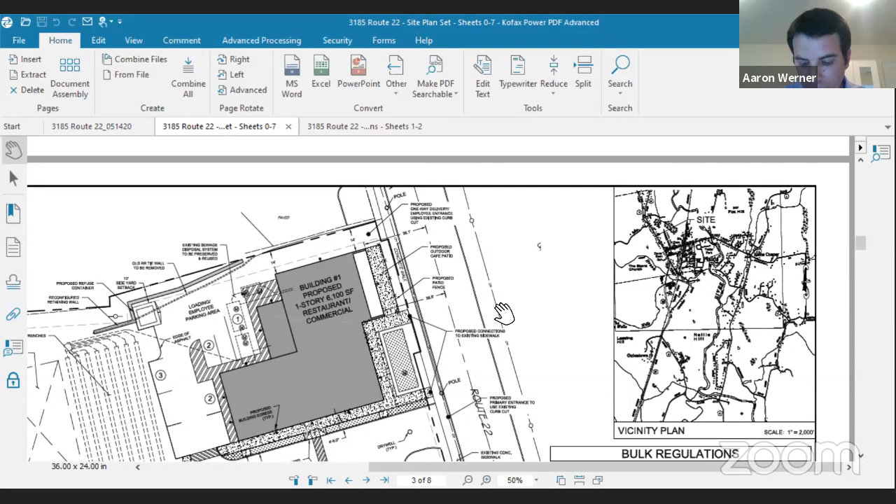Rich added a sidewalk to the plan here, as we discussed last meeting, between the residences and the commercial building on 22. It's shown here. It's connecting to the other sidewalk next to the commercial, and it provides good access from the residential down to the roadway without having to go through the parking lot.

And in doing that, Rich, correct me if I'm wrong, but the impervious went up to 55% compared to 53.8 last time. Right, so it went up a little bit. Right, and we discussed that waiver at the meeting. Right, so that waiver of the exceedance of 50% impervious is still in play. That's still something that's on the table here that they're requesting. That's comment number 10 in my memo explaining that.

That was it. I also wanted to check in, Rich, if you've heard back from the Heritage Program on that timber rattlesnake. Yes, we did get a letter back from them. I don't know if it's something, well, we'll submit that. I can pull it up separately and read it to you, if you want. I think it was their standard form letter.

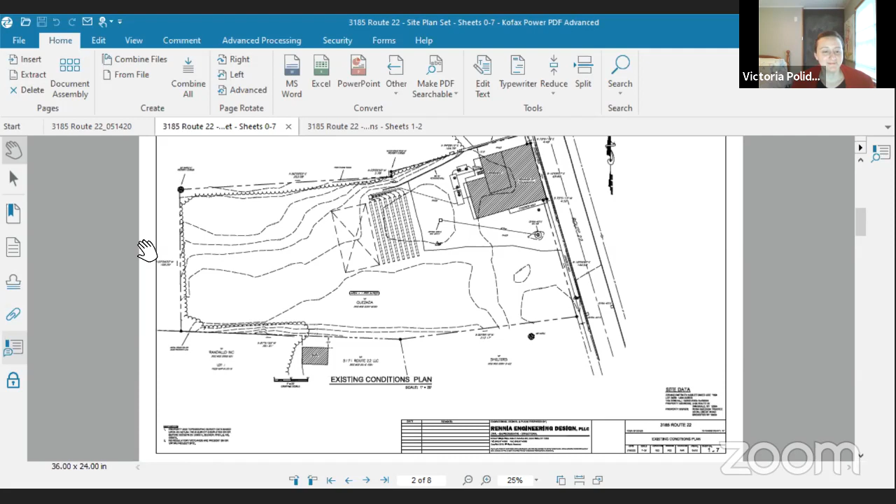Nice to hear you. So I would think that maybe we should ask for the direction, because it could be on the other side as well - on the other side of the highway. Oh, that would take you over to the East Mountain side. Right, so maybe we want to find out, because they're obviously probably not going to be crossing the road. I don't think it's that side, because that would be much more than 0.4 miles across - we'd be going all the way across the bottom of the valley, across the Ten Mile River. Yeah, that's true too.

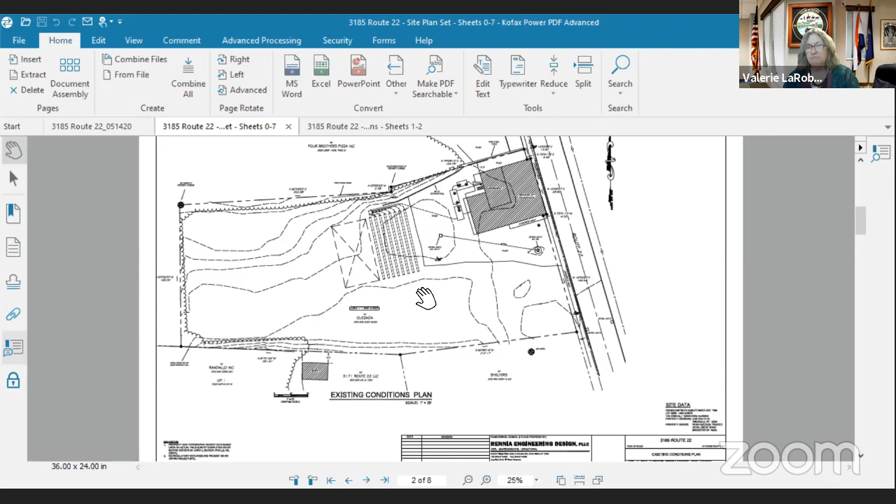Victoria, did you have any comments that you wanted to say? Just if the board is ready tonight, we've prepared a resolution to send to county planning and start the process. But as far as the plans, most of our concerns have already been addressed about the septics, sidewalks, etcetera. Okay, Joe, do you want to comment on that waiver, what your recommendation would be, or do you want to wait until you see the SWPPP? I'm okay with everything. The SWPPP is going to be submitted shortly, and that won't affect it, so I'm fine with everything the way it is. Do you recommend that we accept the waiver request? Yes, I do.

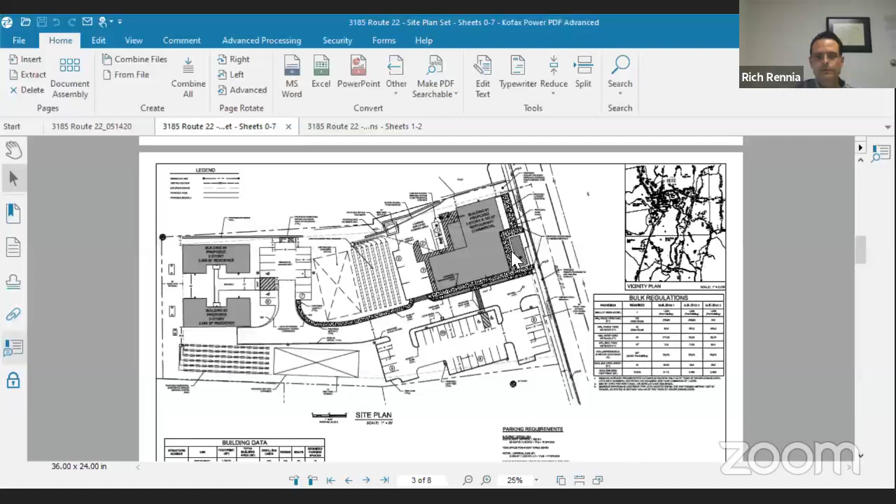That's shown on our site plan, right here—that's the bioretention. Sorry, let me zoom in. So we have the area that says proposed outdoor cafe patio. The hatched area, and then the white area right there, that's the covered portion.

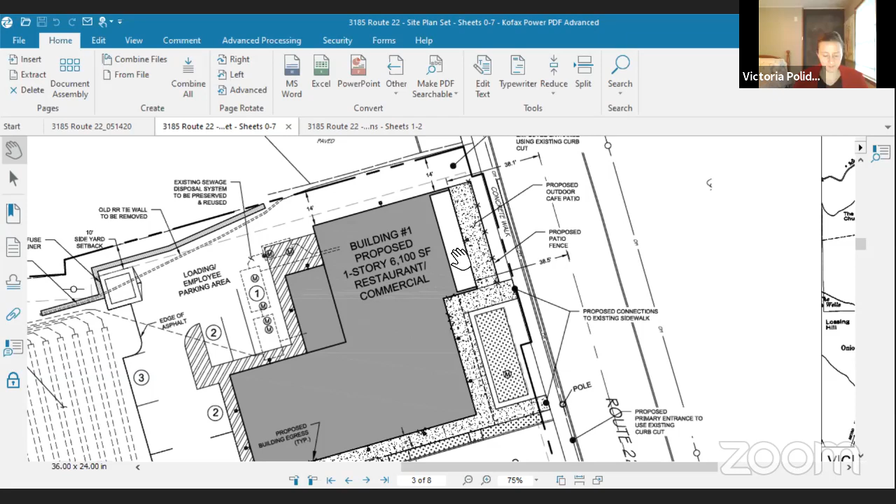Is it fair to say the northern elevation would look somewhat similar to what you're showing on the south side with the windows? Yeah. Is that available to share? We can ask for that—I don't think that would be an issue. I think when it comes time for the actual ARB decision, it would be good to have that.